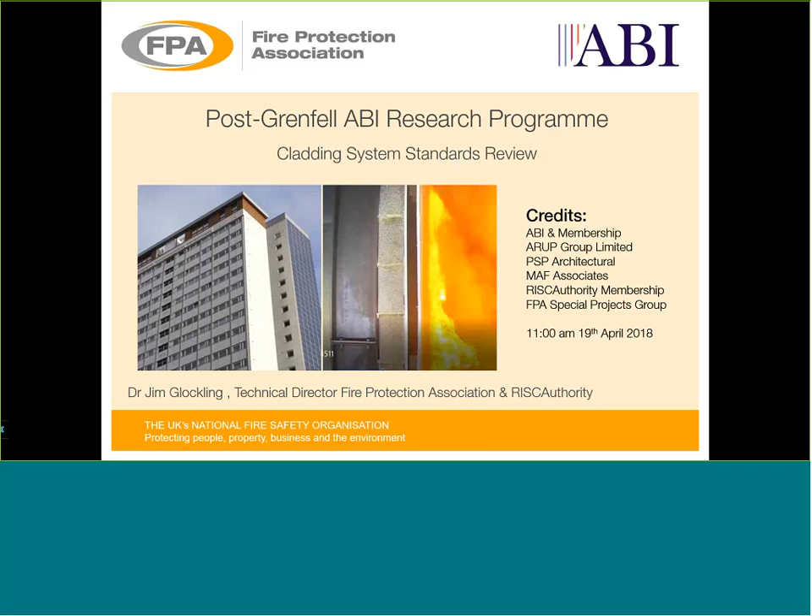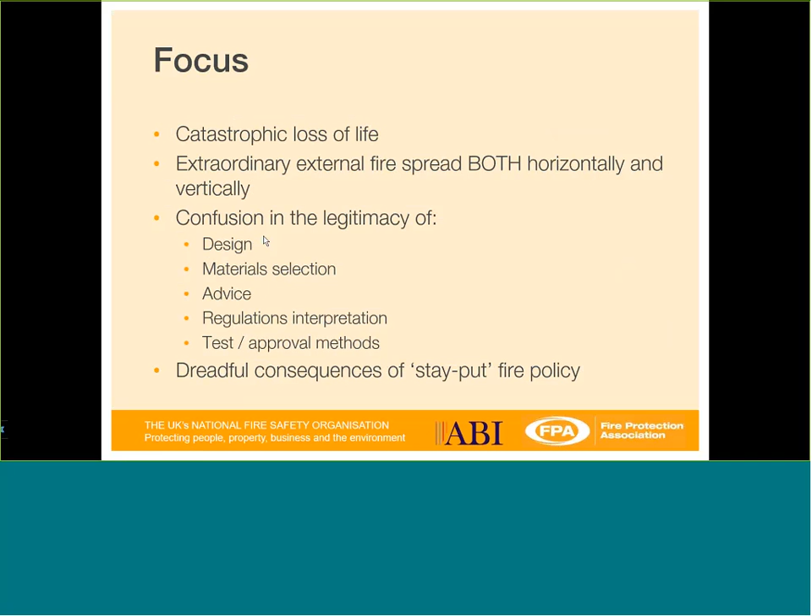Obviously the Grenfell was a particularly tragic event characterized by catastrophic loss of life, extraordinary external fire spread both horizontally and vertically. This is not something which is commonplace. Since then it's highlighted areas of great confusion in the legitimacy of design, material selection, advice, regulations, interpretation, and test and approval methods. And the other dreadful consequence was that of stay-put fire policies in buildings that clearly can't support them.

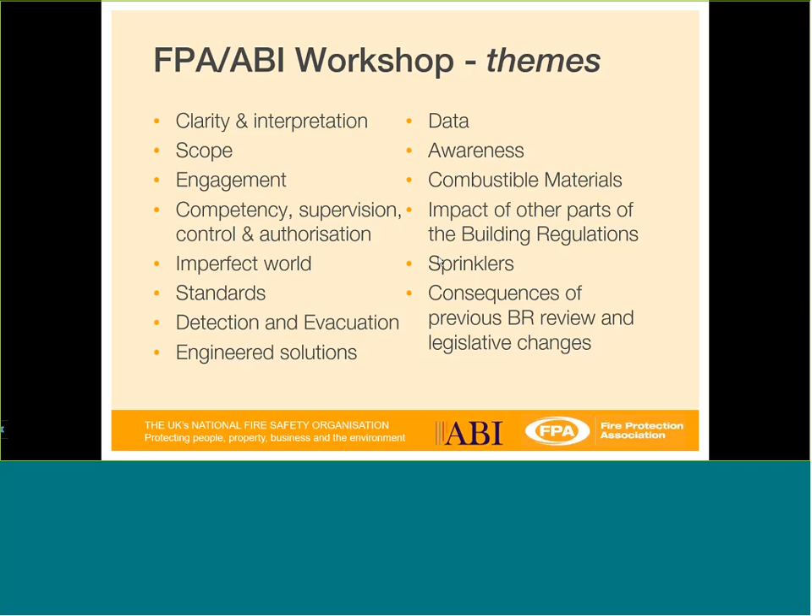Following that, FPA and ABI considered a number of research themes. I'm not going to go into these in detail - these are actually all fully reported in the annexes of the report that will be released very shortly. But needless to say, this is an amalgamation of everything which we've had concerns about over the last 5 to 10 years when trying to influence anything to do with building regulations, particularly in the realms of property protection within the built environment. Some of these are in our gift to change or to lobby for, others less so. But it's quite broad-ranging, and there's hardly an area untouched by where we might lodge criticism.

Having considered those research themes, an ABI working group, specially convened, considered them and picked out 3 specific areas for dealing with. One was to do with cladding and the adequacy of current cladding testing regimes to deliver high levels of fire safety in real-world conditions.

The next theme was to do with sprinklers. Obviously, we are seeing a proliferation of sprinkler systems in the residential environment. This is not an area which insurers have engaged with greatly as a life safety rather than property protection measure generally. But the focus there is really if systems are going to go in, we would like to encourage them to do the job they're designed to do, but also not create any other additional potential issues for insurers, such as the escape of water.

These are obviously additional water-based systems going to buildings where we already have some very poor loss figures to do with escape of water. And then finally, detection.

I think it's pretty commonly understood that detection regimes across the whole of the UK do not serve anyone well, and really the fundamental problem behind this is the poor quality of equipment. We know that better quality equipment now exists that can be much more discerning. Our belief is that at the end of the day, the use of more higher performing equipment could turn the dreadful statistic of 95% of automatically generated alarms being false or unwanted. We could very quickly change that statistic to really an 80% likelihood of there being a fire if they do go off, which adjusts everyone's view of them from the fire and rescue services, insurers and users alike.

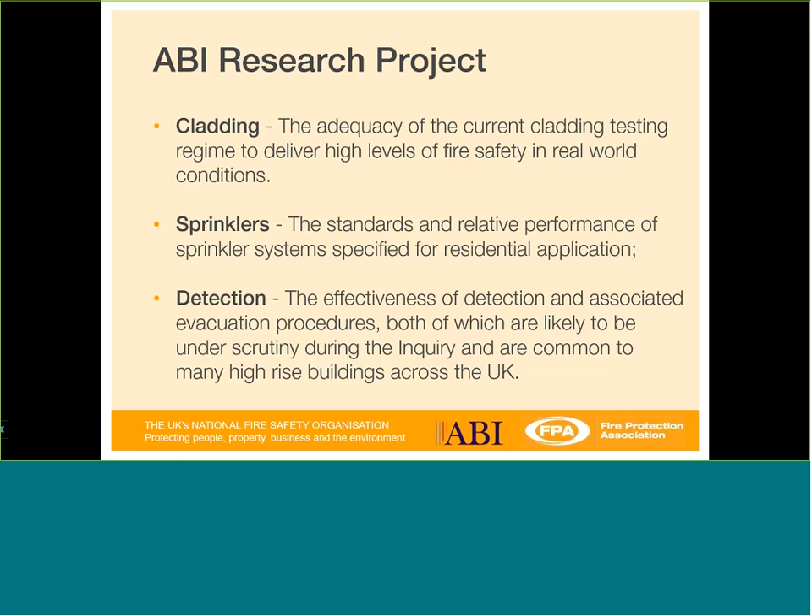So we'll be reporting on those on the sprinkler side of things and detection projects in later webinars.

It caters for two types of cladding systems: ETICS, external thermal insulated cladding systems, where basically an insulating layer is bonded in some way to the external envelope of the building, which might be masonry, and then screens are rendered over to provide the mechanical and weather protection onto them. These types of systems do not have voids within them.

It's not uncommon to see systems involving all of the common insulating products as a means of enhancing building thermal performance and modernizing old buildings. So quite a prevalent technique coming up, and we'll be referring back to that later on in this talk.

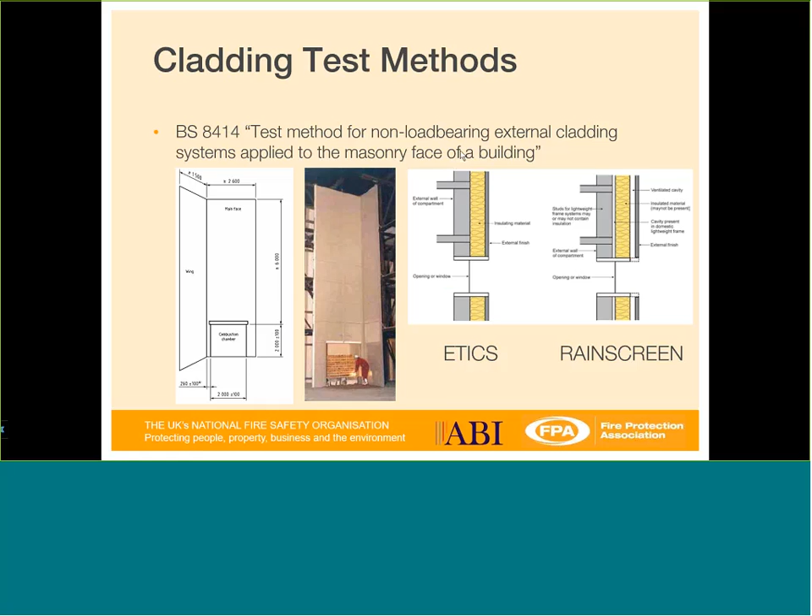With cladding system testing, really the need for large-scale testing is really a consequence of the use of combustible materials. Otherwise, it would probably be kind of unnecessary. This type of detailing infers a system that demands a degree of encapsulation of lower performing materials behind higher performing materials. So quite simply put, the built-up system is tested, and hopefully you're trying to keep lower performing materials remote from the fire scenario.

In the documentation associated with it, there's a key phrase here: the test facility allows external cladding systems to be installed as close to typical end-use conditions as possible. In that sentence, there's an awful lot to be considered about the quality of installation, how it is maintained over time, how it's fitted in the first place, and the through-life performance of the materials not degrading.

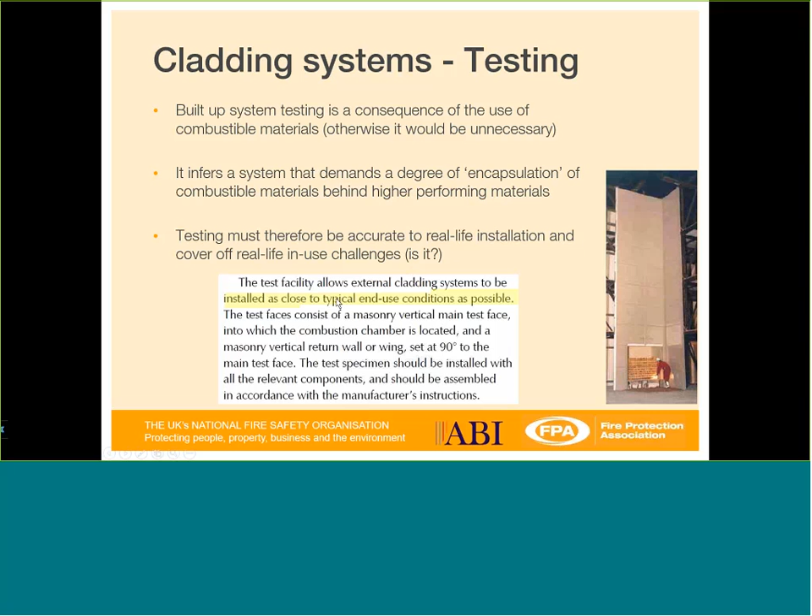Really, I think this is where the basis of most of the issues that we're looking at stem from. Do we actually meet this requirement? Is it installed on a test specimen as close to typical end-use conditions as possible?

So having considered the test regime with fresh eyes, we came up with 5 key areas to look at for research scrutiny. The first being realism of the fire challenge. It's not uncommon for fire challenges that need to be appreciated to change over time as lifestyles change and loadings change because of the way we live and the materials. So it's not unreasonable to see that on a list.

In respect of realism of the installation, you can see on the picture on the right that this is a perfect form wall with no breaches, whilst this bit down here where the crib is placed simulates a fire in a room with a window which has broken. Above it, there are no further windows or anything else. We just have the perfect form of the cladding system above, and we might draw some conclusions on that.

Third point, in terms of realism in the installation, anything to do with fire: there are a number of requirements for fires to progress, and oxygen provision is one of them. May seem like a strange thing here, but actually this is not uncommon to see where you are trying to test at a smaller scale something that is trying to mimic something in practice that might be much larger.

And so we need to consider that. The fourth point: performance of cavity barriers. Cavity barriers are a relatively recent introduction to the built environment, but they have a very valuable job to do, for a number of reasons which I'll describe later, so as not to repeat myself.

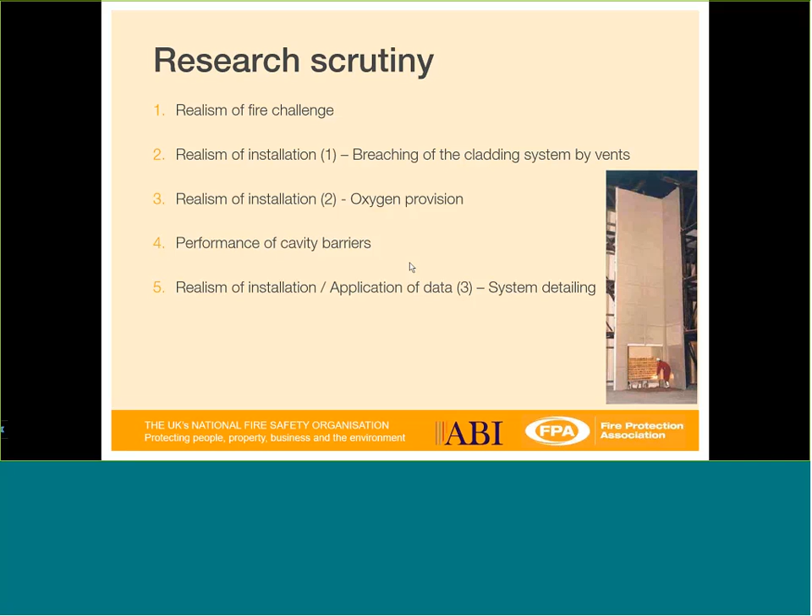So the first point: fuel load relevance to modern materials and lifestyles. The BS8414 test uses a very substantial wood crib. It is a very large fire by any measure, but it's just wood at the end of the day. From previous insurer research we did back around 1999 and 2000, when we were LPC, we recognized after auditing many buildings that about 20% of the calorific value of rooms in residential and office environments is not uncommon to see made up from plastic materials.

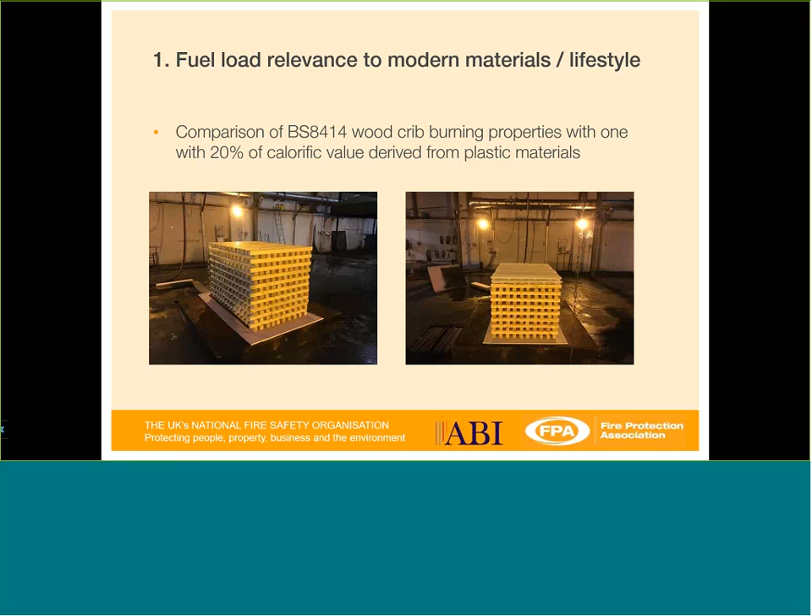So what we did simply here: the crib on the left is the standard 8414 crib. The crib on the right has exactly the same total calorific value, but we've added 20% of its calorific value as plastic rather than wood - we've exchanged it, to see how they might burn differently.

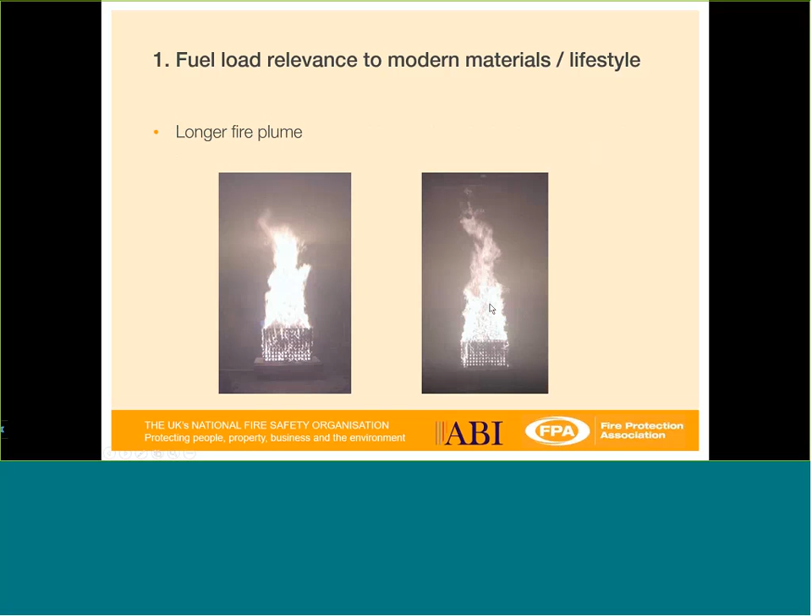And what we find is we get a longer fire plume. The height of this ceiling is around 6 meters, and during the course of the test we generally see - difficult thing to judge in some ways - but a general average of an extra meter in height on that fire plume. It's also accompanied by increased temperatures. So in a range of thermocouples above this plume, we see the temperature rising, obviously, but flattening after a period of time to a pretty steady state value with a peak of around 650 degrees.

When we include plastic in the mix, we had to cut this test slightly short - not for any sensational reasons, but the temperatures in the ceiling space of our laboratory were getting a little outside our comfort range. We do have some plastic skylights up there, so this isn't anything to worry about, but we have to curtail the test to stay within the safety requirements of the building we're doing it in. But you can see there we see no abatement in the rate of temperature increase, even up to the point when we stopped it at around 10 minutes.

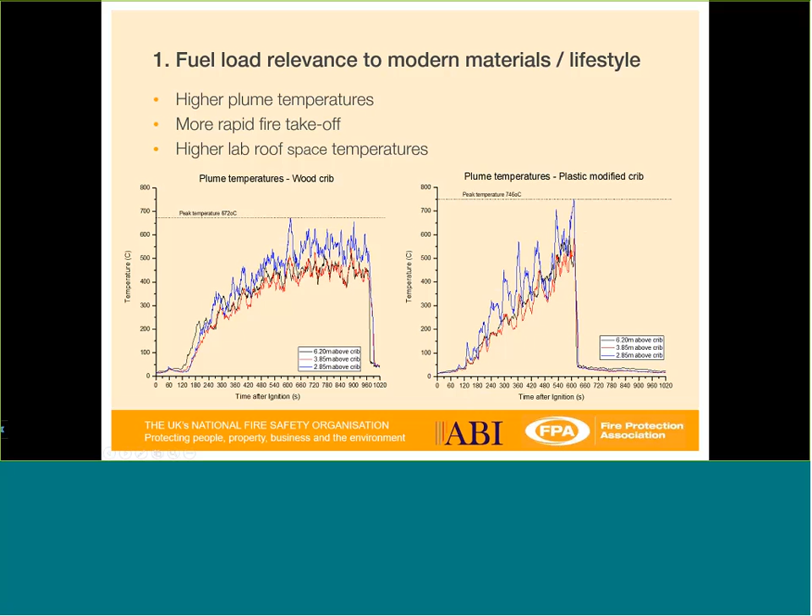And we see a peak temperature of around 100 degrees more. Now these may seem like marginal differences, but when we're dealing with materials such as aluminium, which can lose a great deal of its strength quite readily with temperature, they're certainly grounds for further investigation in our mind.

Now, we've got to revert back - this is meant to be a real-life test which demands accuracy. And so we do believe we can conclude from this that maybe it is time to look at the fuel load and see if it's properly taking into account modern materials and lifestyles.

The BS8414 test assumes a plume length of around 2 meters. Of course, if it's 3, that can be very different and very meaningful, especially with the presence of penetrations, windows and doors within the additional meter that we might actually threaten any system with.

So I've mentioned that aluminium is particularly susceptible. At about 300 degrees, I think it's lost about 50% of its strength. At 550 degrees, it's lost all its strength and is being quite radically consumed. So I think there's a case to answer that another 100 degrees might be meaningful too.

Now, I'm not saying here that the pass-fail criteria for such a test wouldn't need to change also. So let's not assume that everything that's been tested with a wood crib might automatically now fail with a plastic crib.

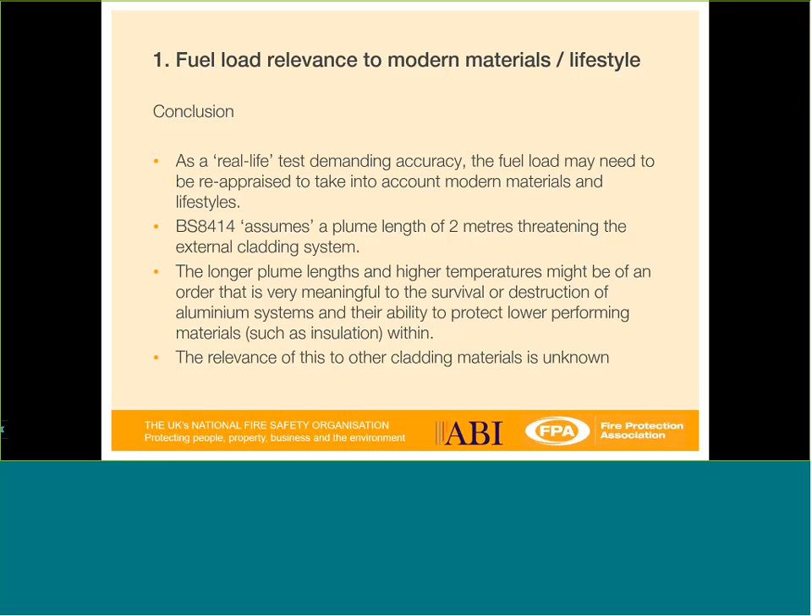So that concludes the first part. Now the second part is particularly interesting. You noted before that we test in a very perfect form. If we think about what's actually happening there as an encapsulated test, where lower performing materials are basically afforded some security behind higher performing materials, we do have some concern that the presence of vents—plastic vents with plastic tube—is not incorporated as part of the test, because it doesn't take too much thinking to realize that's a route for fire or flames to access the void very early on in the fire event.

At least that's the hypothesis—especially bearing in mind that they're not tested, and also the external envelope of the building is not considered part of the compartment boundary. Whereas a vent between yourself, your neighbor, or an access hall as part of a fire compartment boundary would have to be appropriately fire stopped to the same fire resisting qualities as the wall itself, these penetrations going out to the external don't need any such fire stopping applied to them. So there's no requirement for them to be any stronger than they materially are, and if they're made of plastic, we know that can fail quite quickly in fire.

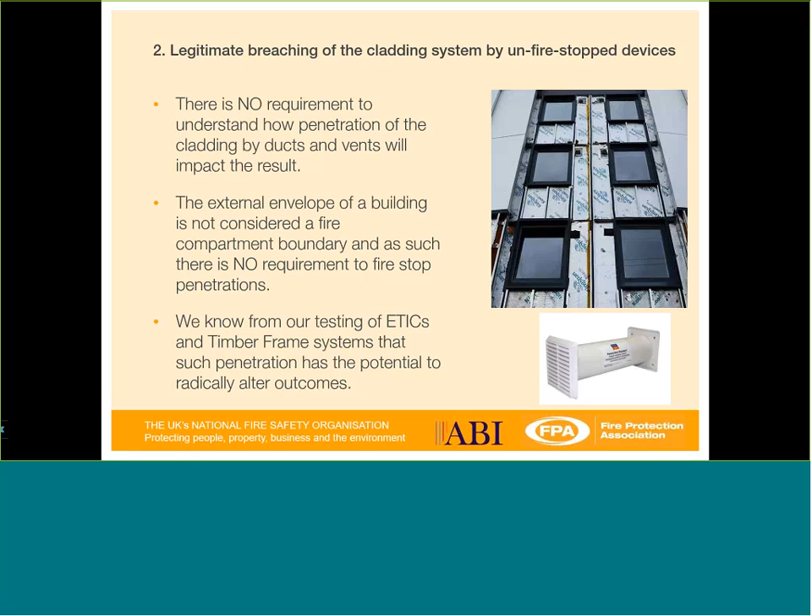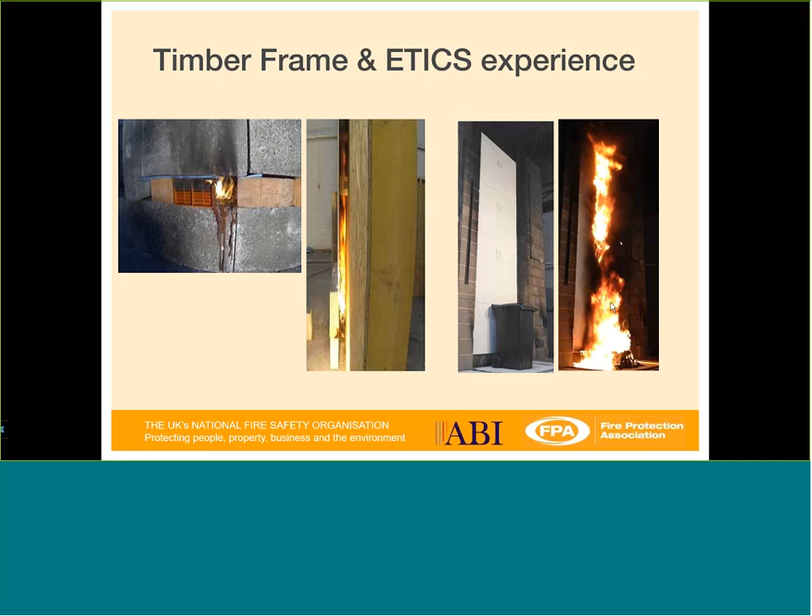Just by the inclusion of vents in this particular case, we turned something that had previously been quite a non-event into the situation you see on the right-hand side, with fire able to climb from ground floor to the top. So we know that penetrating cladding systems can be problematic.

So here's our actual setup. This is a cut-down version of the 8414 rig on the left-hand side, spanning about 5 meters in height. The other thing we've changed is the combustion chamber—we've raised it up so that it has some height to it. So when we install a vent, it's mimicking a little more the upstand you might see in a kitchen, with fire in a kitchen and a vent at the upstand to extract for ventilation purposes. So we can nominally provide a route for fire through this vent if it wishes to do so.

The direction of spread into the void could be from two directions: first, the flames issuing out the front of the crib and breaking into the void, or up the back—so a pretty realistic scenario. Again, everything we put in here was fire resistant, non-combustible, except for the vent itself. We've used high-performing fireboards, front and back, simply to create the void in this case.

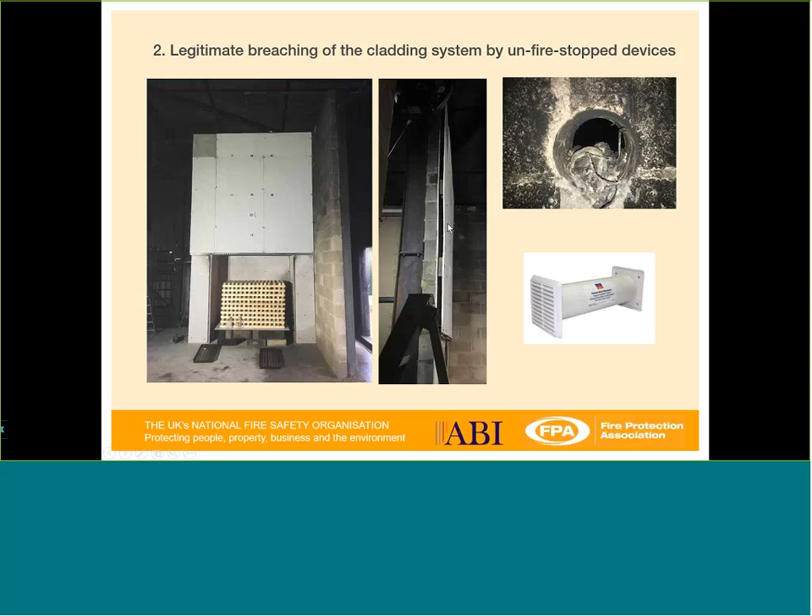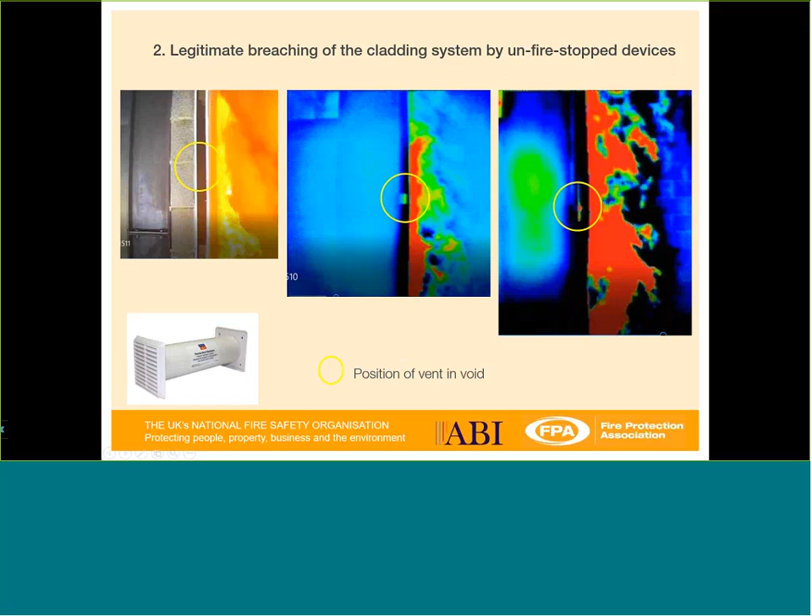What we find quite simply, as these yellow circles show where the vent is, and the pictures taken with our thermal imaging camera, even within the first few seconds, we start to see exactly where that vent is because there are hot gases and flame passing through it. That will manifest as fire in the void long before fire can break in from the outside, which is the only route from perfect construction.

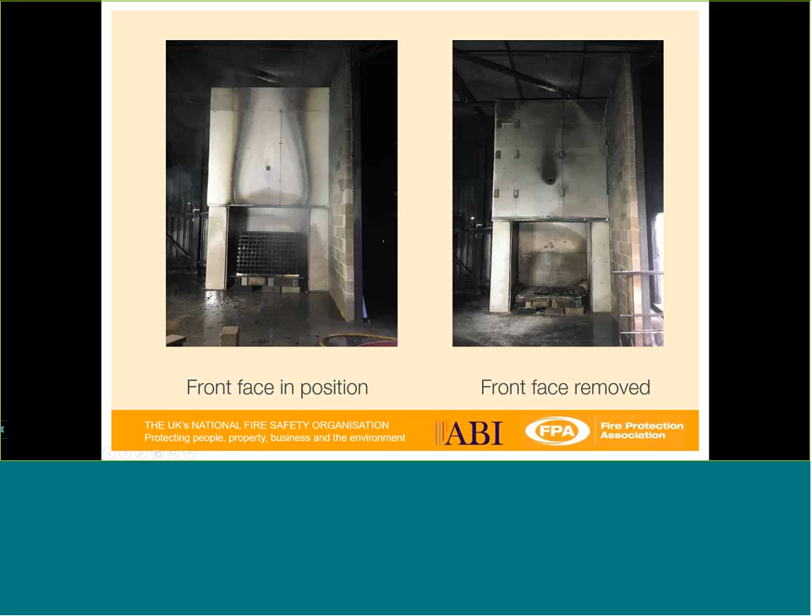Now, the consequences of this can be potentially quite far-reaching, because we have a different mode of fire, and quite a legitimate mode of fire entering the compartment itself.

It provides an early route for flame passage into the void. The plastic provides a fuel source in its own right, and of course that can travel up and it can travel down. It will result in a direct flame attack of the cavity barrier system. I'll talk more on that later, but at the moment it's safe to assume that cavity barriers could be preheated into their safe, closed position by the allowance for only external heating of the face. With direct attack with flame, they may need to perform slightly differently or be asked to perform slightly quicker.

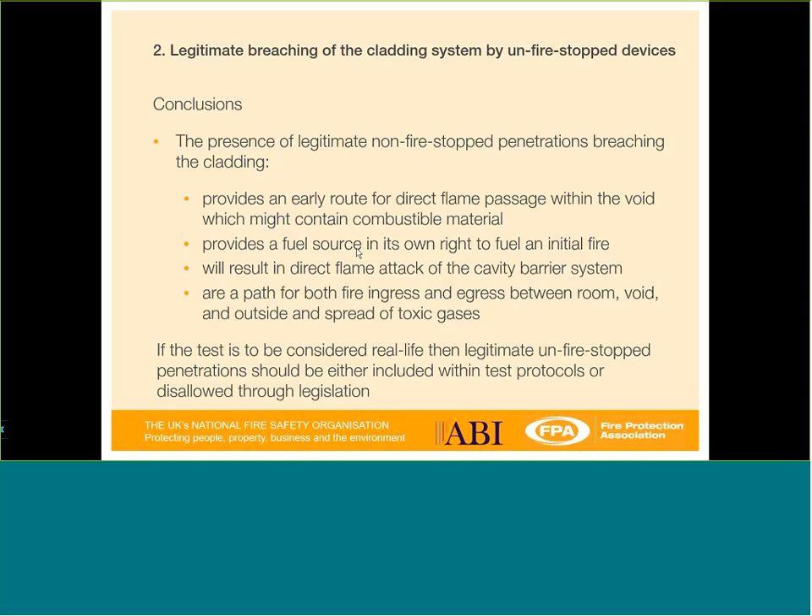We mustn't forget that this is a path for both fire ingress and egress between the room, the void, and the outside. So whilst the BS8414 might simulate a kitchen fire, routes in through soft points in the cladding system are as pertinent to a car fire in the car park down below, or a wheelie bin fire indeed. So I think there is scope here to say that in the respective vents and penetrations, we have not lived up to the ambition of ensuring that the test is real life, and this is something we will be taking forward.

Now, the third one, which is a little different to think about, and we've done it using indicative materials, is to do with oxygen provision to the fire itself. Is it a fair test in that respect? We all know that a good way of limiting fire is to suffocate it. But if you're testing real life, you need to allow the provision of oxygen and burning regimes in a manner that is fair and appropriate to the end-use application. I'm not entirely sure this test meets that.

We thought we'd do some indicative testing on indicative materials, just to highlight what we're on about here. Rain screen cladding systems have to have a void, and they have competing requirements. When there's no fire, they need to allow the free movement of air to stop damp issues. They also need to allow water to drain out from behind the rain screen cladding. These are not perfectly sealed systems.

They can't be sealed because they need to equalize pressures which can build up within the void itself so that they don't distort. So it's a very difficult thing to actually achieve, to say we want the void to be open normally but closed under fire.

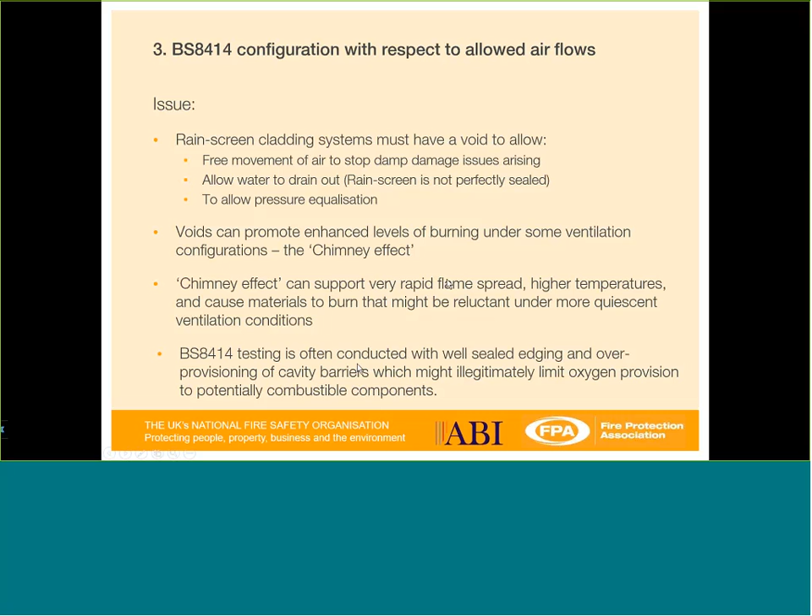But we do know that having a void can lead to an issue of chimney effects, as described previously. And the criticism we might have is that BS8414 is often tested with quite well-sealed edging, particularly on the sides and the bottom, and possibly even with an over-provisioning of cavity barriers, which might illegitimately limit oxygen provision. This sounds like small details, but it may be relevant, and we need to have a look at it.

So just to highlight the point of what we talked about, we ran this on a three-sided rig. We just used wood as an indicative combustible material. If you put that on this rig and light a fire at the bottom with no void, it climbs up a bit, but it's because the flow of gases and re-radiation doesn't really happen in this open environment. It is a relatively slow and well-controlled process.

So if we then create a void, which we've done here by including a layer of glass over it, but seal it up well, then obviously yes, we've got a void, but we're very well sealed. So actually, any fire that you do initiate at the bottom of this will self-extinguish very quickly indeed.

But if you create a void and then you allow oxygen in, particularly at the bottom and the top, and allow it to be slightly leaky as a rain screen cladding is, then you can get very, very rapid fire development from bottom to top. And it really is a completely binary change that you see.

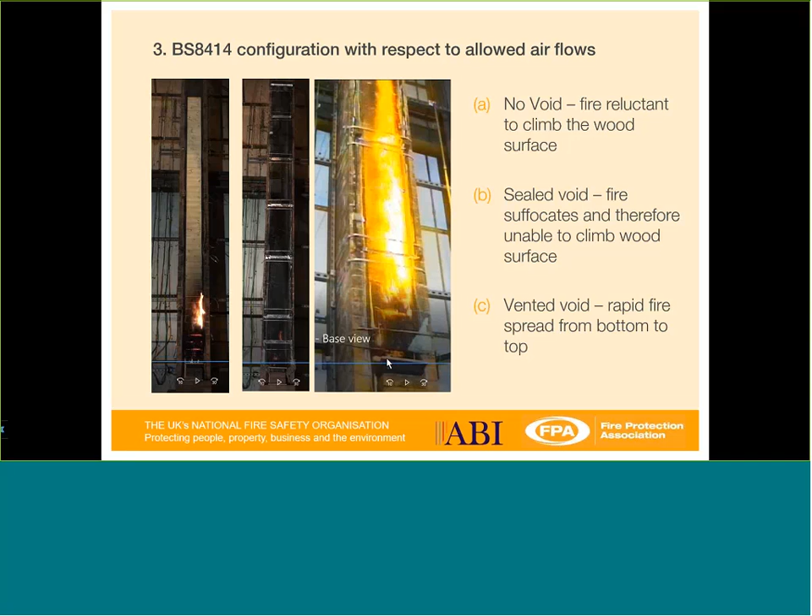I suppose at the end of the day, the question we're asking is: is the 8414 test more like a suffocated regime, and is it unfairly disallowing the chimney effects to take place within the cladding system? I'll leave it there, since this is getting into a bit too much detail. But rapid fire spread is very important when considered alongside the performance of cavity barriers, as we'll show now, because there is a rate issue here.

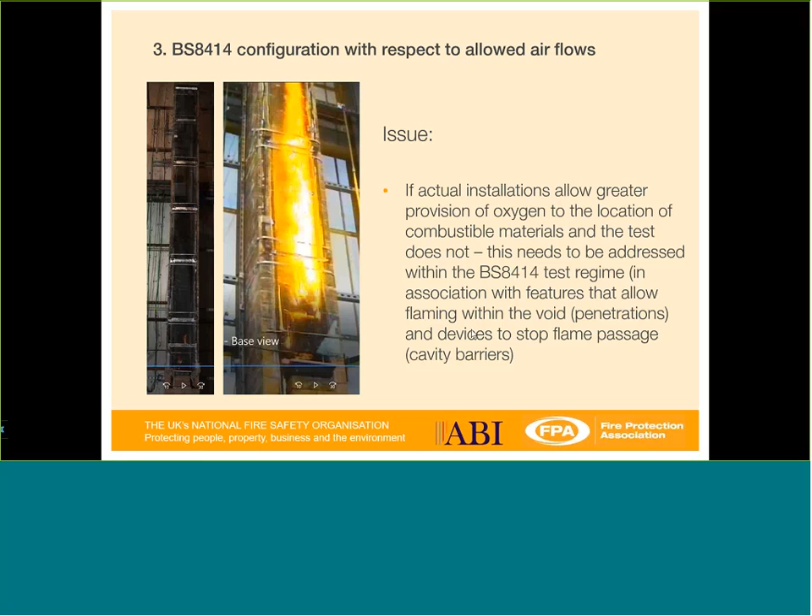Cavity barriers need to operate on a timescale that's coherent with the ignitability of the materials they're trying to separate and the speed of fire spread, which is why this is an associated issue. So on to the fourth bit: performance of cavity barriers.

Cavity barriers, people talk often as though they've always been in buildings and always expected to be, but that's actually not the case. As short a time ago as 1980, there was no guidance. Following the Knowsley Heights fire, amendments were made, but we didn't really have the materials to do the job properly.

So there were some quite loose requirements, basically saying you should restrict the passage of smoke and hot gases as much as practical. I think there we saw systems where the void was closed down slightly, but not totally. Then as recently as 2000, we started to see some very clever dedicated products, and guidance has since been issued from the Centre for Window and Cladding Technology.

There are requirements, so rain screen gaps for ventilation, which allow water to drain and the void to vent freely, must not restrict the void by more than 50%. So typically a void might be 50 millimeters inside. A cavity barrier would be allowed to protrude into that space by 25 millimeters, and then under fire it will need to intumesce or swell to close off the other 25 millimeters.

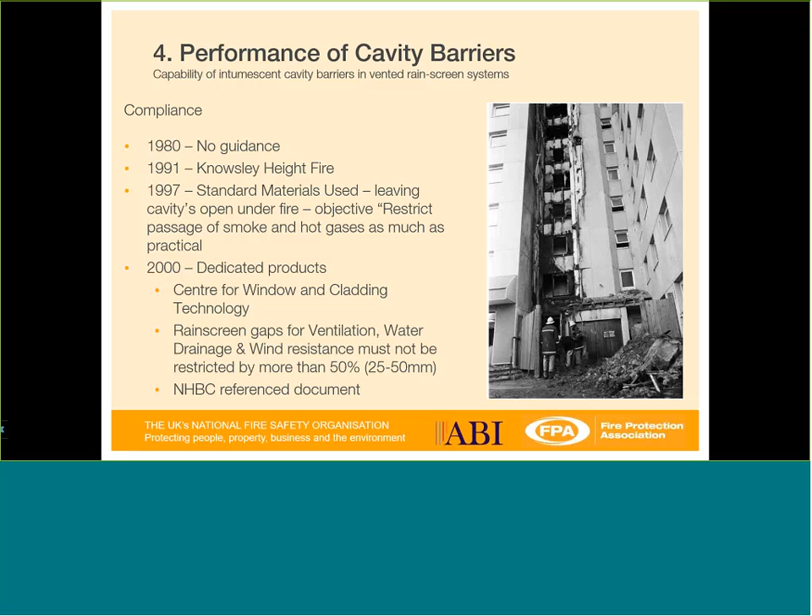And there's some quite nice products that have come on the back of that. So I think we've just been through this: they need to prevent the passage of flame and the passage of heat.

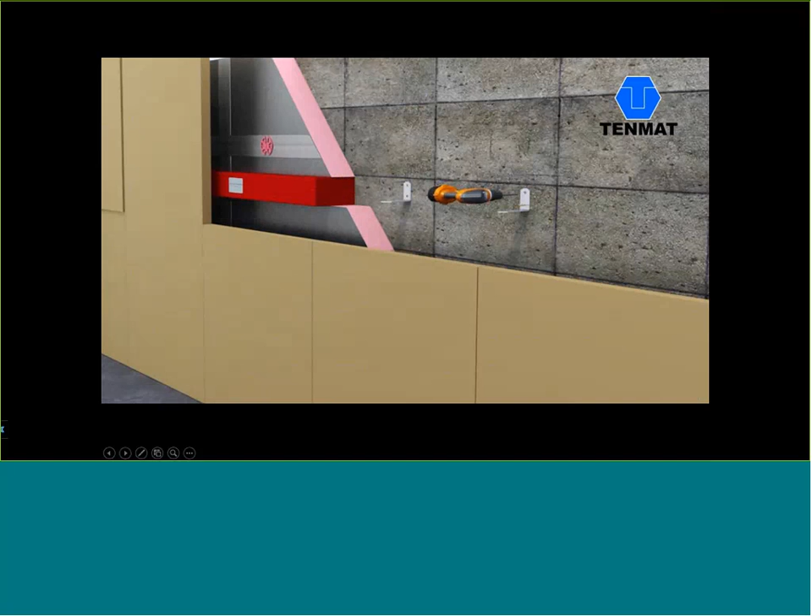How they're installed - I'd just like to show a quick video of how they are installed. They form a break between the insulating layers. You can see in this case it's protruding proud of it, and under the action of fire, the front face will intumesce and close up the gap to the back of the ACM.

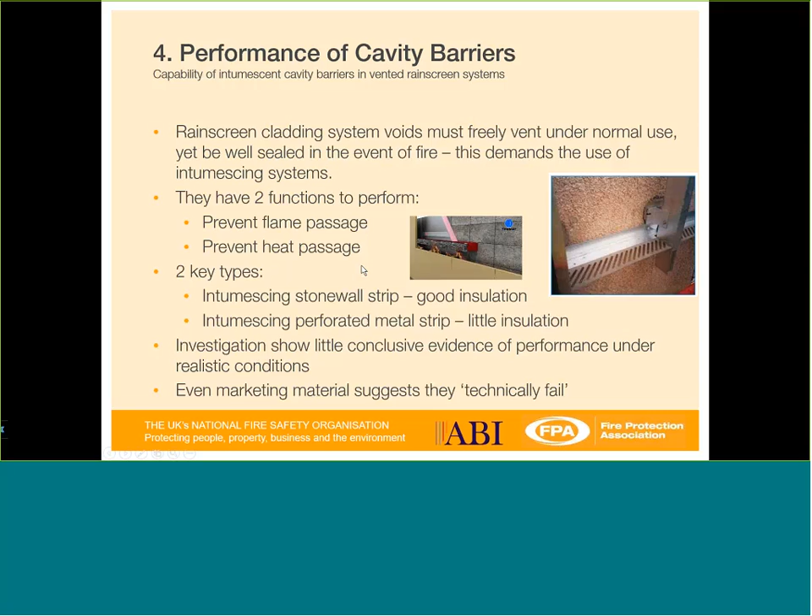But I think when you look at these things quite closely, we see some funny things. I mean, now is the time to get into the detail of what's being installed on buildings. When we look at some advertising material for some of this cavity barrier - I'm not saying this is bad cavity barrier by any means - but some of the things you see written might make you worry.

So in this case, with this product, it says when adopting the fire resistance testing procedures, technical failure of the integrity or insulation would be deemed to have occurred because flames pass through it, obviously. But a consultancy, I guess under a desktop study, have considered the product for rain screen cladding systems and expressed the opinion that it's a practical cavity barrier solution for this application.

Now, that may be fine, but it is of interest to someone like ourselves, I would guess, that those phrases or that phraseology isn't connected with the ignition properties of the materials that they seek to separate. I could well imagine that if it's separating quite high-performing materials, which do not ignite very readily, then it is fine for flames to pass for a bit.

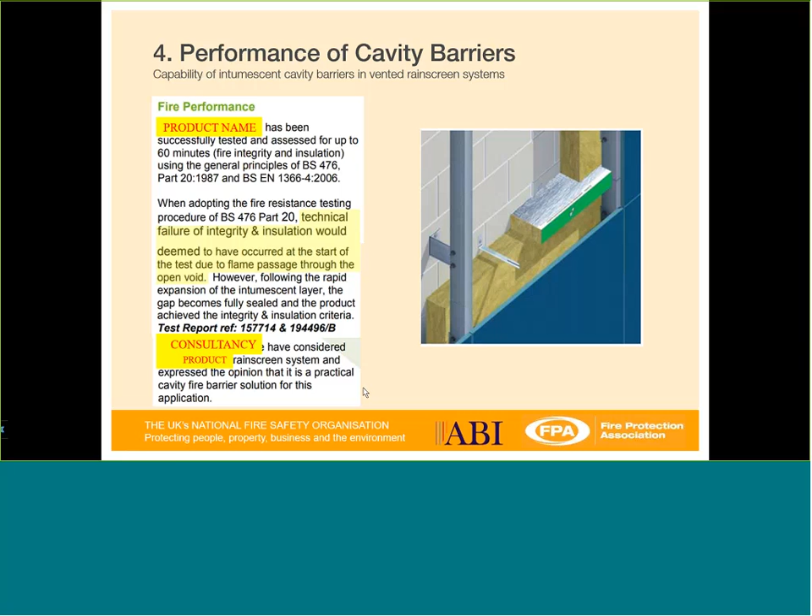But I can also think of some materials, particularly some of the lighter weight vapor membranes, where flames passing for 30, 40 seconds would be important to address.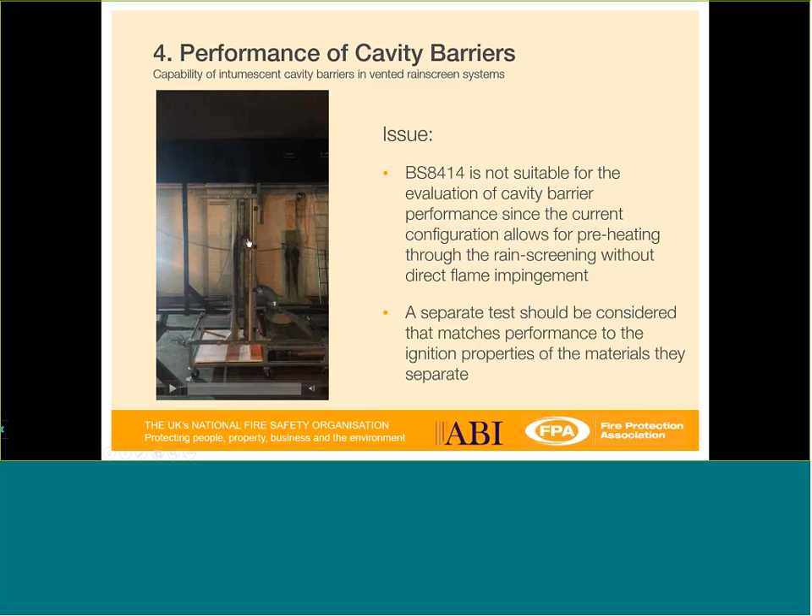So we built a very nice rig in the lab, and here it is. It simulates - we have a gas fire, we have a vent hood, we have a vent duct, and we pass flame into this cavity here. Our fire stopping, our cavity barrier, is located in this location here. Hopefully you can see my mouse there, but it's just two-thirds the way up the rig.

If I just play this video to you, you'll see the fire break into the void here. There we go, coming through our kitchen duct.

There we see flames passing the cavity barrier, which they have to do because they activate under the energy, but they pass for probably the best part of 30, maybe 40 seconds in some cases, until eventually it will intumesce and then fill that void. I should add that the sides are all sealed here with glass, so this is a proper cutaway look. And there we see, as we've sealed out the route for flame up, it starts to actually suffocate the fire out in this case.

So they're very clever devices, don't get me wrong on that, but you can see they do have a performance time of work, and it seems probably slightly strange that their use and application is not connected to the performance and the materials that we seek to separate.

So let's just be very clear, everything in that rig is entirely non-combustible, so there's nothing to burn, but you can imagine some materials put in there where actually the fire would have spread and gone on to the next one.

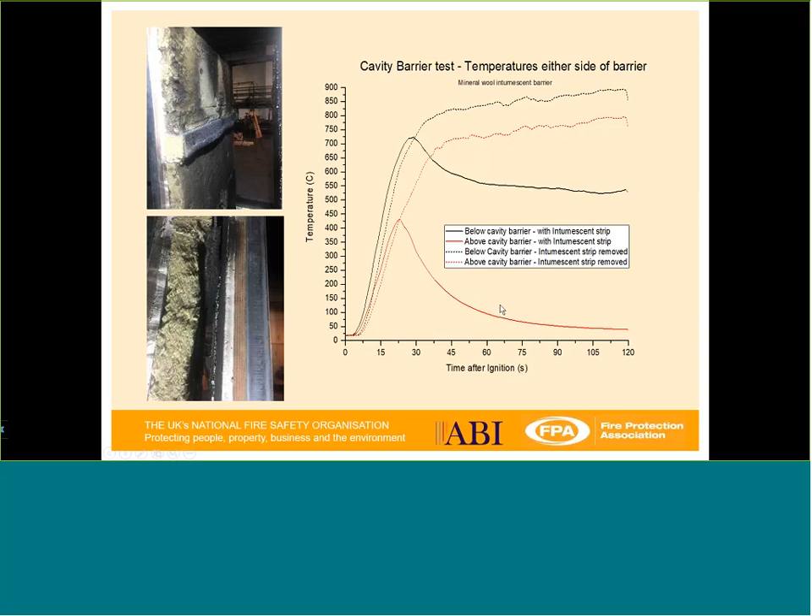So not really a criticism of the product, but I think there are questions to be raised about its ability to separate certain materials. Right, on to the final part of the test regime that we have here, and I think my feeling is this is one of the most important parts of this work.

At the end of the day, is what is tested representative of the systems that they seek to approve on buildings. When doing a test like this, there can be some confusion about what constitutes part of the rig and what constitutes part of the system under test. And in fact, there are installation detailings that are vital to understand also.

So there are some key features about this test, and what we asked Arups to essentially do was to take one of the DCLG tests and then say, how would this collection of materials actually be installed on a building? And so some of the detailing is a little bit difficult to explain, but we'll do our best. I think hopefully at the end of it you'll see the point of why we're looking at this.

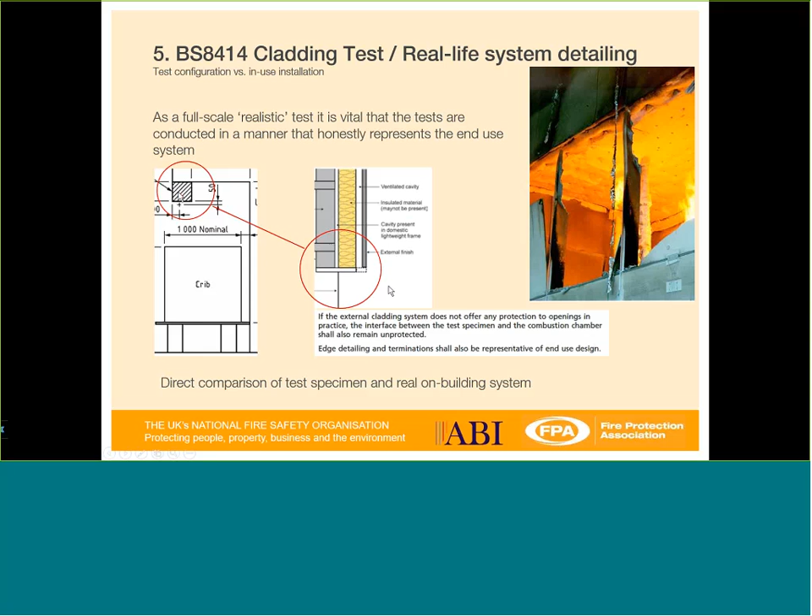And certainly there are detailings to do with the near edge close to the crib, which you need to consider - are they there in practice?

I'm sorry for falling back on some rather difficult diagrams here, but on the left-hand side, through this next suite of slides, we have our DCLG test replication, and on the right-hand side, we'll call it our typical on-building design. It uses the same materials, but we probably installed them more in accordance with how they might actually go on a building. So I guess we're looking to see, are we submitting a Challenger tank in order to gain an NCAP rating for a Robin Reliant?

If there is any misalignment, there might be cause for concern. In the case of the DCLG test of this type of high-performing ACM panel and high-performing insulation, which was stone wool, so everything basically non-combusting, we can see that the railing system has an extra rail assigned to each panel, so we have midpoint support for each panel.

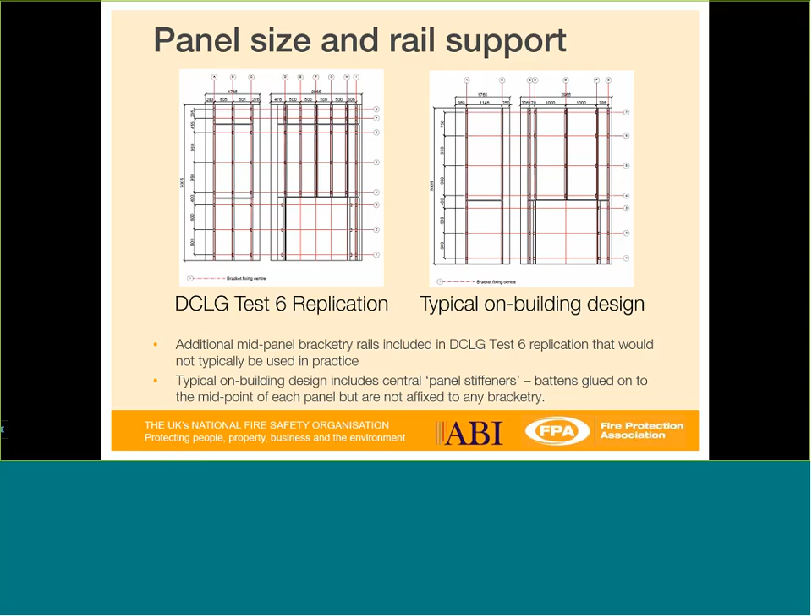On the right-hand side, we have a railing system probably more akin to that on a building, where the panels are just supported at their edges. So the additional stiffening of any panels required for wind resistance on an on-building type design is often not achieved through the addition of extra rails, but more through the inclusion of panel stiffeners, which are battens glued onto the panel but not affixed to the building itself. So there we see one design change.

There can also be differences in cavity barrier provision and specification. In the DCLG testing, I think they looked at quite high-performing cavity barriers, giving 90 minutes, 90/60 and 90/30 rated products for their ability to resist fire and insulate, whereas actually the requirement on buildings is 30/15. These are things that need to be understood by anyone conducting a desktop study used to look at the differences.

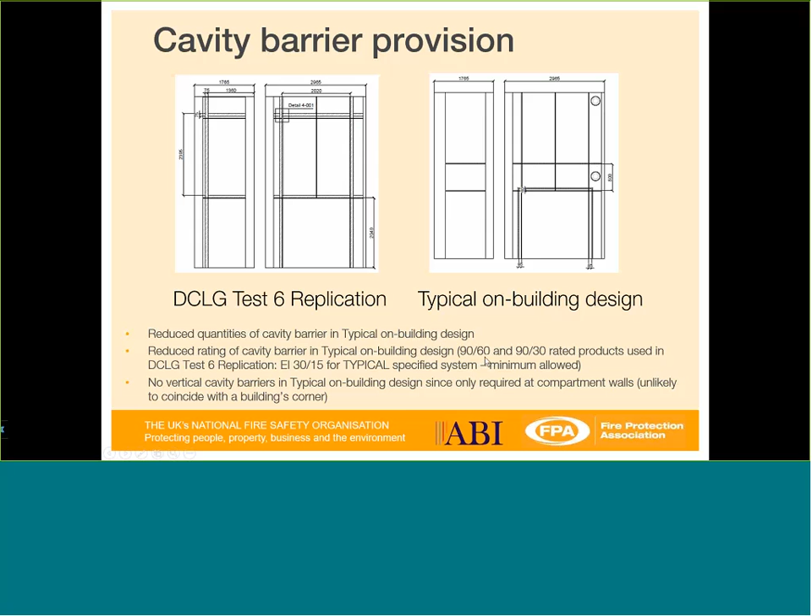There can be difference also in the positioning of the cavity barriers. In our simulation, we put them probably where the floor slab would be, right above the window, and that's probably a reasonable location. But in testing, we see them put in areas much higher up, and probably perhaps an unrealistic location. The ability of that to influence results might need to be considered also.

One of the crucial things is how the ACM panel is actually fastened onto those rails, and this is where we see some of the biggest differences. In the DCLG test, the panels are essentially riveted onto all supports around their edge and along their entire length. This is quite a high level of fixing, and it's not the most common fixing method used out there.

Such a system might typically be more often adhered to the front face of the building by a hanger system onto the rails, and that's indeed what we put in front of our test when comparing them. This is a sort of hook-on system, so very much a lower level of attachment to the railing system, which is already enhanced behind.

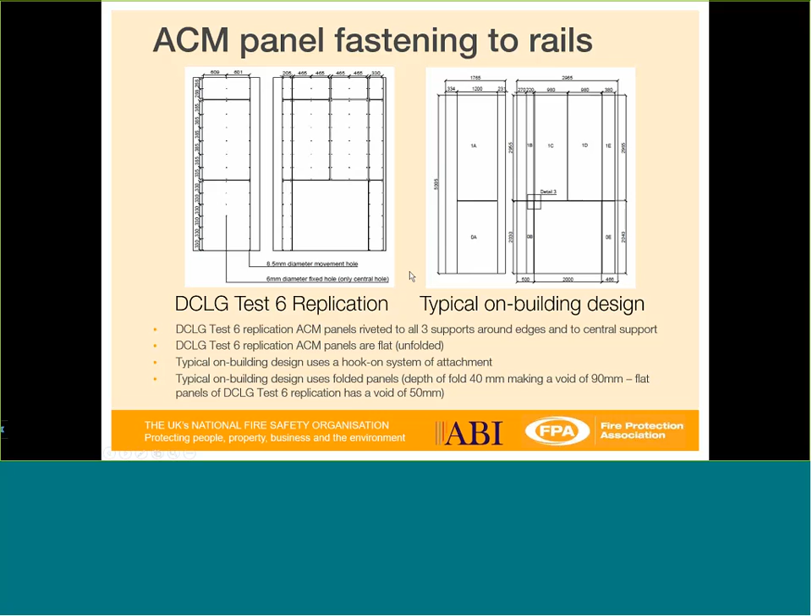Also, looking at specific detailing, this is a test of the cladding system, and really the window can form part of this as well. There can be very big differences in the near-fire area as to whether the system is going to have recessed windows or windows which are flush with the cladding system. In the system tests as conducted by DCLG, there is an assumption that the windows are flush with the cladding system.

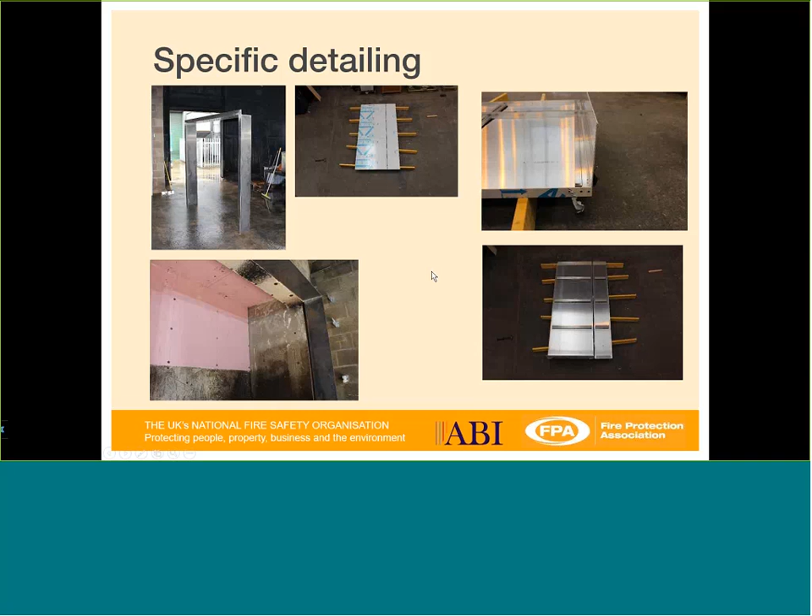So here we are. We see the built-up systems. On the left-hand side, we have the DCLG test. We've used stone wool insulation here. There you see the railing system, and there you can see the riveted-on panels. These are, as I mentioned before, cut-down rigs. They're certainly not full-scale 8414 tests.

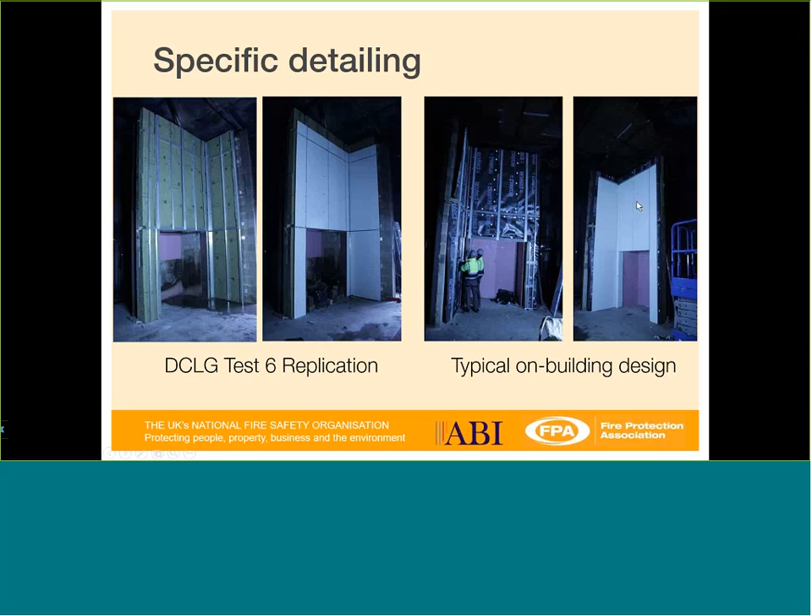The other thing we did was on the typical on-building designs, we introduced the other missing components and materials - the vapor barriers and cavity vapor barriers that might exist in practice, which do not generally form part of the 8414 test. And there we see the hung-on system.

Really, the outcome of these tests, when we look at how they performed, we can see that side-by-side comparison. Using the standard wood crib, we've introduced none of the differences explored in the previous four phases of work described. But I think you can see that the burnout area is a very controlled consumption of aluminium from the ACM panel. It's not allowed collapse of any features. Nothing's fallen off - it's just been consumed by the temperature.

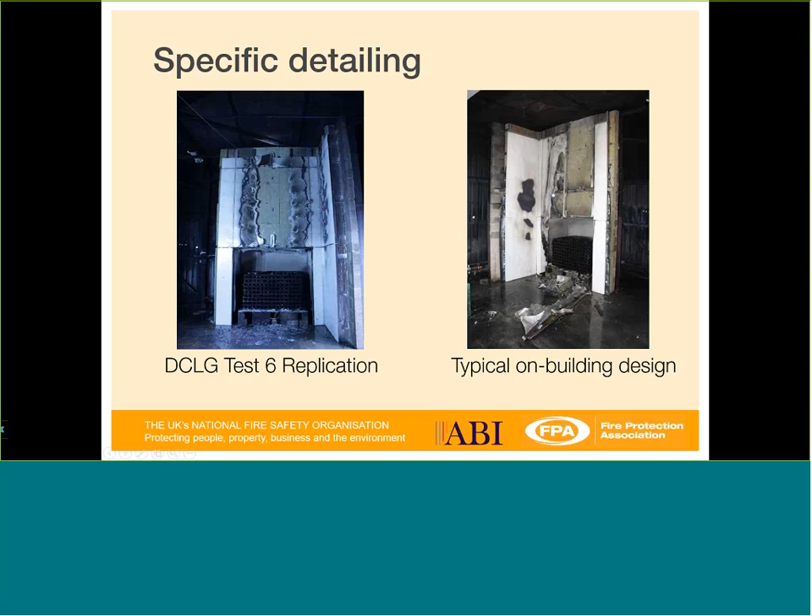But also, I think it's probably safe to say that the central support has afforded a great deal of additional resilience to the lateral spread of fire in this case. Whereas the typical on-building design, you can see from what's lying on the floor there, was really one of collapse and enhanced lateral spread throughout. Even though in this particular case we reinforced the fire stopping, the cavity barriers, so we have two layers there rather than just the one we had on the DCLG test replication.

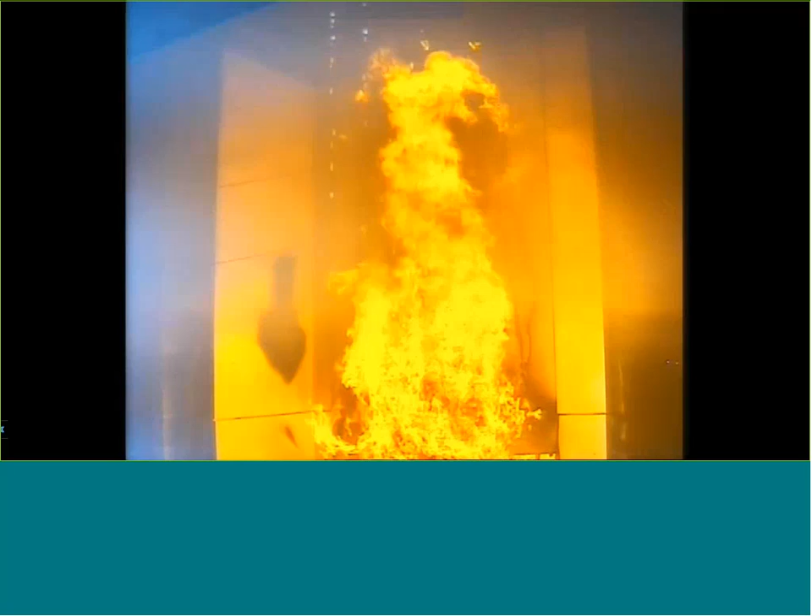A little bit of video just of a key point, I suppose, at the point of collapse. So this is our on-build test. This was the origin of that bit that fell on the floor, but you can see how it starts to fall away. It's also interesting to note that we have flaming out the top of the rig, and there's low-level flaming as well. I think this is from the various breather membranes that were in there, burning in their own right.

These are, as I mentioned before, materials that are not generally included in the test. So you can see how panels are falling off there, breaking away as the hanger system has melted through. It's quite a lightweight hanging system until it eventually falls off in this case. And you can see the residual burning - I think this is pooling, possibly of the plastic of the breather membranes down here, and also at the top we're seeing some burning there.

Oops, sorry, I didn't mean to.

So in terms of cladding tests and real-life system detailing, I think this is quite a critical area. There's absolutely no criticism of how the test houses report what they have done. The reports are very full and very detailed, and they are very clear that the test and the data derived from it is only applicable to the system that has been tested and in the manner it's been put together.

So it's not just about the materials, and I think that's where there's a problem with the focus at this moment in time. Everyone is talking about the materials and not how they're actually assembled together. I think we're showing here that there can be some quite big differences - potentially unrealistic reinforcement of the over window section, unrealistic support for the ACM panels, and unrealistic sealing against air ingress.

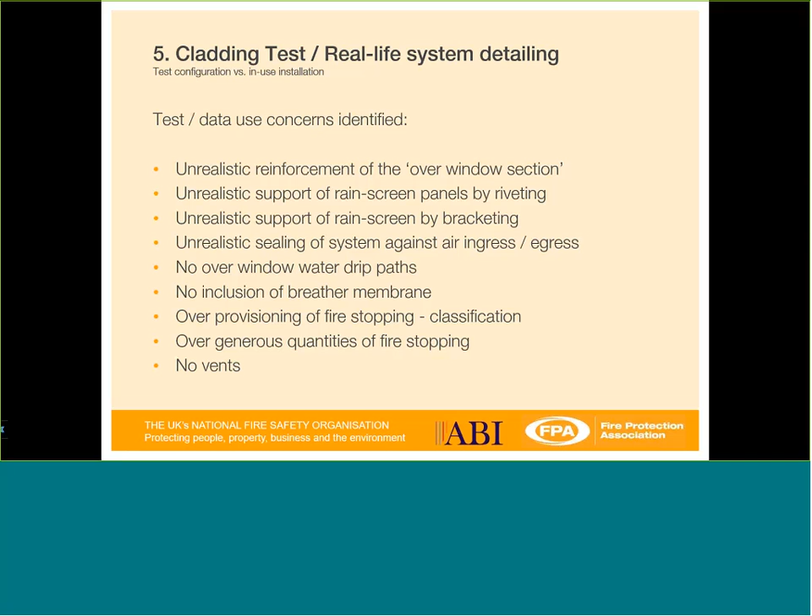Typical features which must allow water out and air in might be missing. Inclusion of things like breather membranes which might be combustible in their own right, over provisioning of fire stopping, and in terms of their classification, an over-generous quantities of fire stopping and no vents. So you can see there are differences, and it really is a case of going back and doing the detail. When someone says it's tested to 8414, you really need the test report to say, is this the same as what I am asking to judge against?

And so really to close, I think one of the things we hope to do here is really to reopen the book on how these systems are tested. But also, it is a very complex area, and there are some strong cases for actually lobbying for non-combustibility. It does simplify everything. Really, built-up system testing is complex if real-world challenges are to be appreciated.

And we know what they are: inexact installation, wear and tear over time, modification, and really a changing risk environment. It may have been okay to have some building coverings while bins were metal, but now all bins are plastic, and so we can invoke a change in the environment, which then becomes important.

The selection of exclusively non-combustible materials really reduces the through-life susceptibility to all these challenges and makes life a lot easier. Here's a photograph taken by one of our surveyors of a building. This turns out to be an ETICS building, but clearly a change has happened to expose a lot of polystyrene in a location that's very readily accessible. If you saw other materials in there rather than polystyrene, you might not be too bothered about it, but seeing polystyrene exposed obviously makes life difficult.

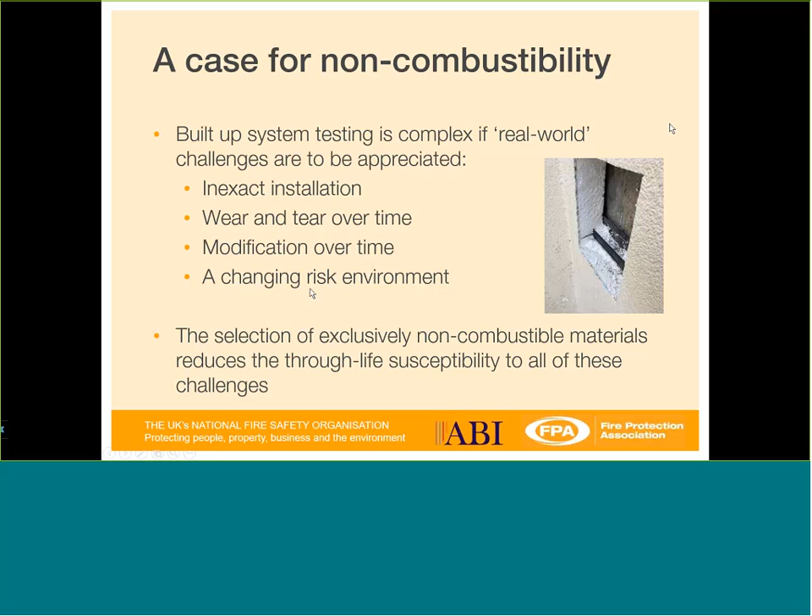So what is non-combustible? It's not a simple question - it can be quite complex, because it depends upon the scale of the fire challenge set. I want to take an example here from some historic testing, which might prove to be a more beneficial way going forward to provide really key information to insurers and fire engineers alike as to what the differences can be.

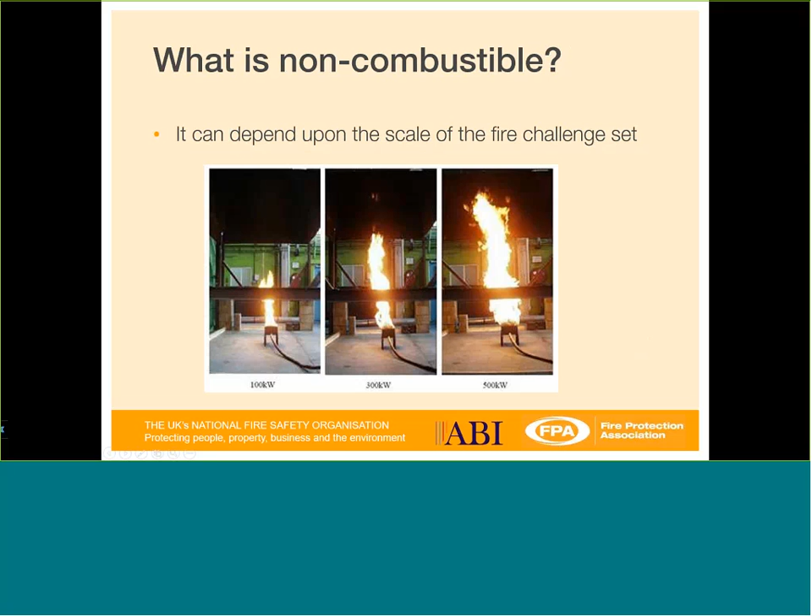This goes back to some sandwich panel testing done some time ago. They can respond again - that is an encapsulated type system - and here is a case where we have sandwich panels with expanded polystyrene. We know they don't perform too well, but as a test regime, it's a good case. There is protection behind steel paneling, and really the response to any test depends on the challenge that you give.

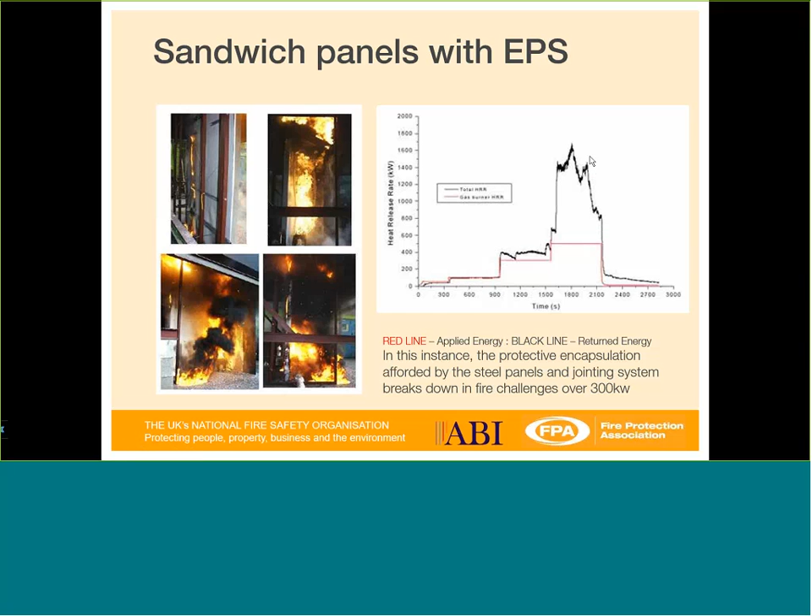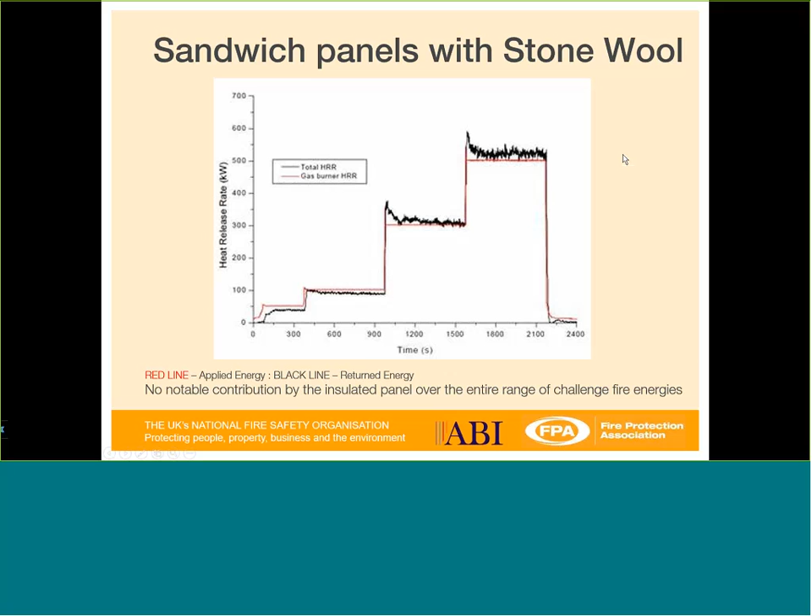These are some of the thoughts that we can feed into any review of the BS 8414 program. So just to finish off, the work will be presented to BSI with a view to instigating a review of how cladding systems are tested. It will be presented to the Hackitt Review, Grenfell Inquiry, and BRAC, the Building Regulations Advisory Committee, for consideration.

I think we will be using it to support a case for the prescription of non-combustible products in high-hazard applications, including multi-story buildings. It could also be used to support a case for understanding whether the government's appraisal of the population of at-risk buildings is actually well-founded. And maybe future work will focus on the impact of identified challenges in an environment of limited combustibility.